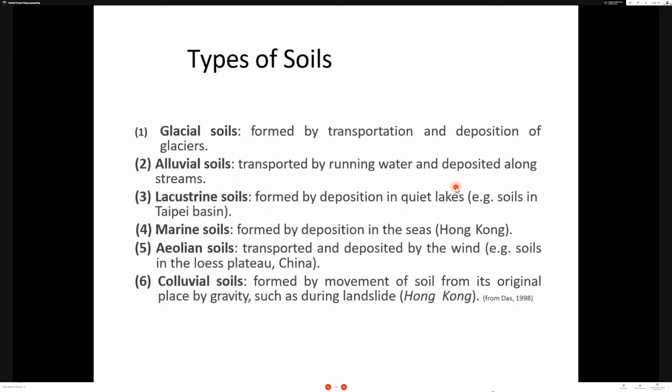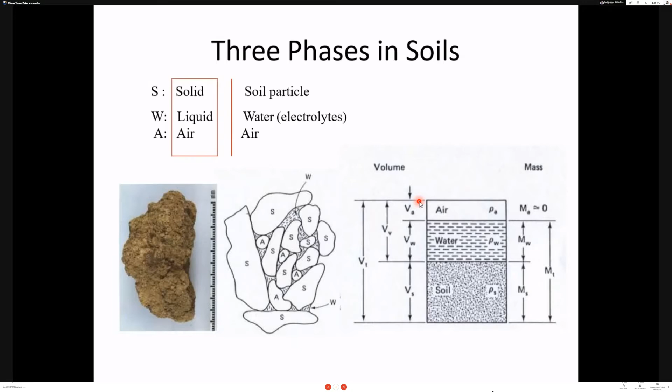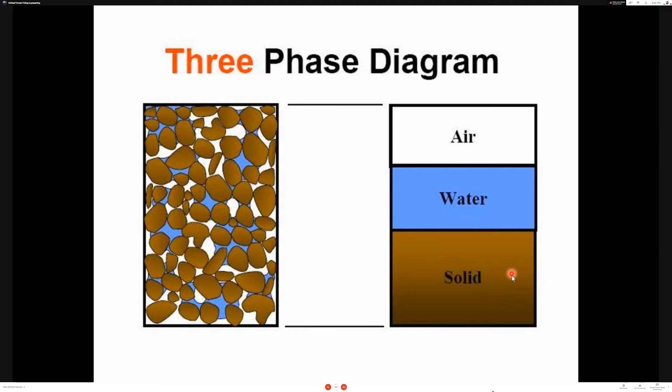So the three-phase diagram of soil: you have air, shown as white spaces or voids within the interstices of your soil particles, which are represented as brown particulates here. Your water is also along the pore spaces and serves as a bond for the particles, and your solid is represented in brown. However, we also have a two-phase saturated soil phase.

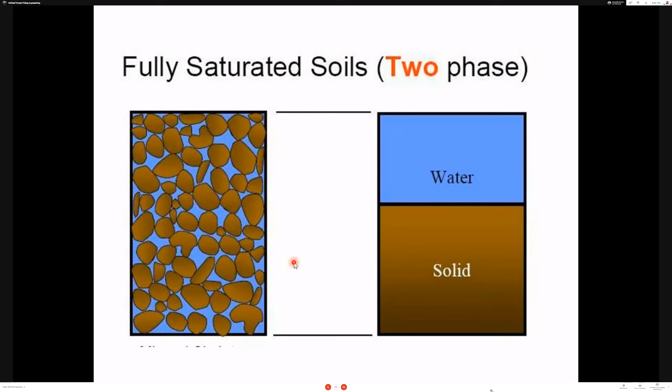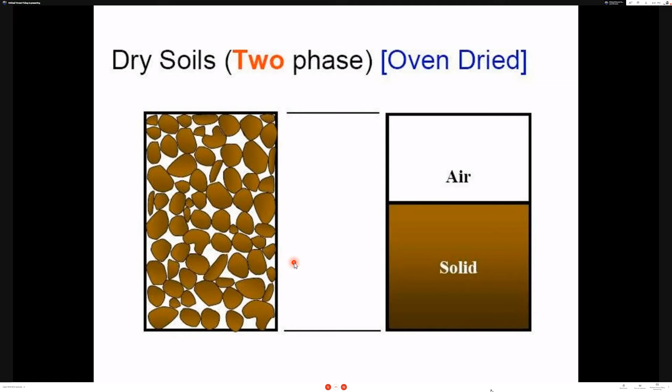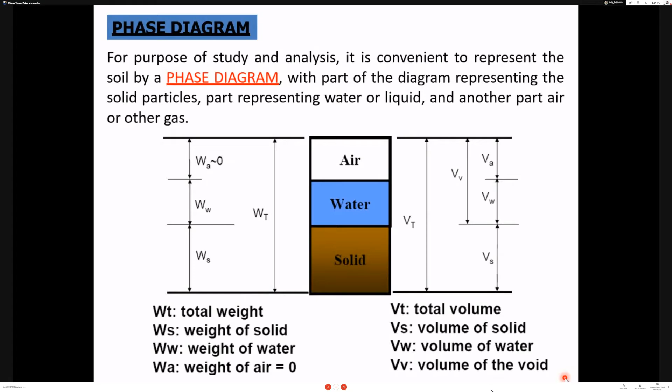Let's check the volumetric ratios for your three-phase soil diagram. For void ratio, denoted as E, all you have to do is determine the volume of voids over the volume of solids. First you determine the volume of voids, which is just the combination of the volume of your water and your volume of air. So that's volume of voids divided by the volume of solid. That's how you get the ratio.

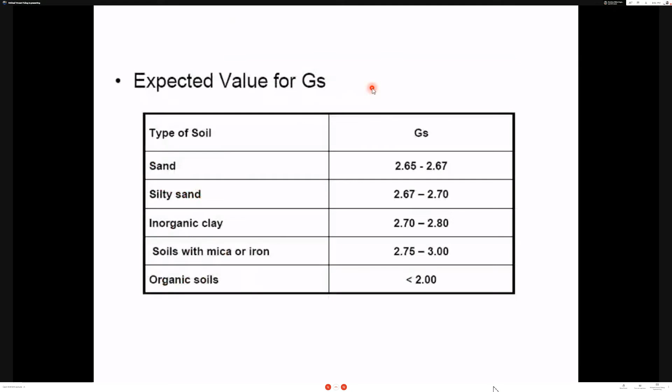A number that basically represents the porosity, because these are voids. So the volume of your voids divided by the total volume represents the porosity. Balik tayo sa porosity, which is the total volume of your voids over the volume of your soil, total volume of your soil.

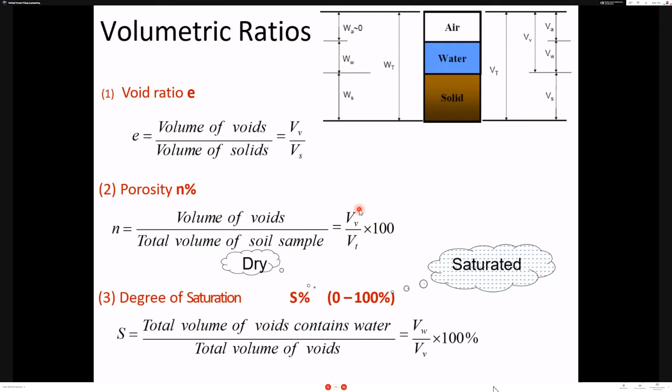That's why you will come up with the following simplified equation, E is equal to N over 1 minus N, where 1 here is the total sample. So aside from this, if in an exam you're not given the total volume of your sample and the total volume of your voids, but you're given the porosity, you can use this equation to determine the voids ratio of your sample. Understood?

So these are just simple mathematical manipulations of your equations. However, conversely, your porosity can be determined by dividing your total voids ratio over your volume, which is denoted as 1 plus the ratio of your voids. So that's the determination of porosity in this case, using the simplified equations in the phase diagram.

So on this phase diagram, remember that your porosity is denoted as VV over VT, or the volume of your voids over the total volume of your sample. And your VV can be represented by E, meaning the total volume of your voids can be represented by or represents the total voids ratio itself.

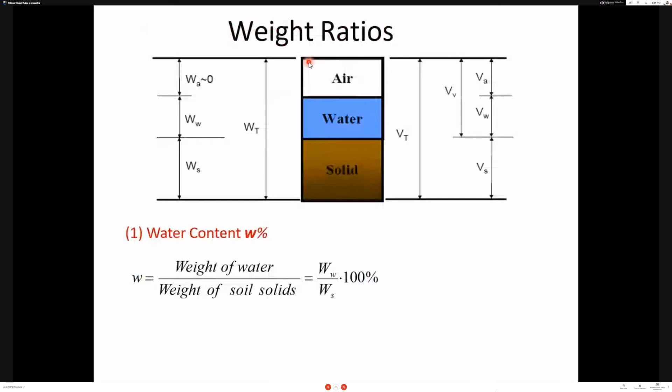First, the weight of your water can be determined by the volume of your water times the unit weight of your water, as determined in this section. This is the determination of your submerged weight with respect to your saturation of the sample, and your total wet or moist weight itself. That's why you're able to come up with this equation.

So you are going to divide the denominator and numerator on the RHS by VS. In this case, you will come up with this one. Okay? So you can use this. Actually, you can use this, guys, depending on what is given, but you can also use this equation.

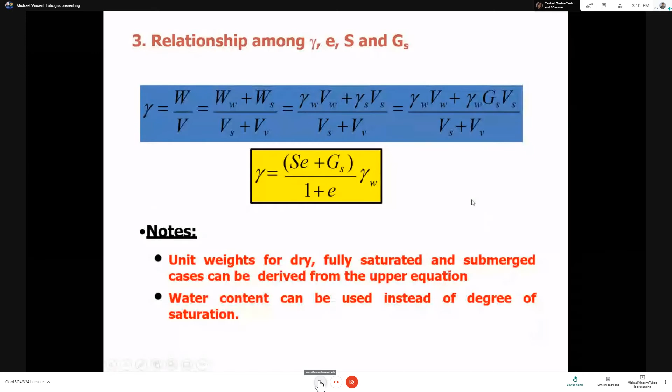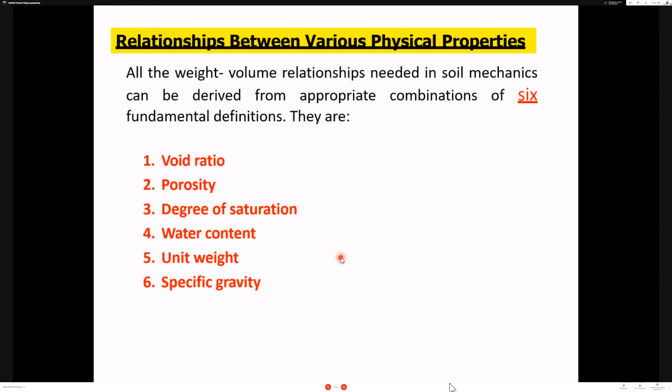Saan ako to, guys? Kindly screenshot this one. Ito yung mga formulas, important formulas na pwede mong gamitin to determine the relationship of your saturation, void saturation, the saturation of your soil sample, and the specific gravity. Familiarize yourself with these equations, guys, and as much as possible, familiarize yourself with this symbol.

Okay, let's have a sample problem. So if you have a moist unit weight of your soil that is 19.2 kilonewton per meter cube, and given that the specific gravity is 2.69, mean to say this is just the specific moist sample, and its water content is 9.8%, mean to say the water weight is 9.8%. How are you going to determine the dry unit weight?

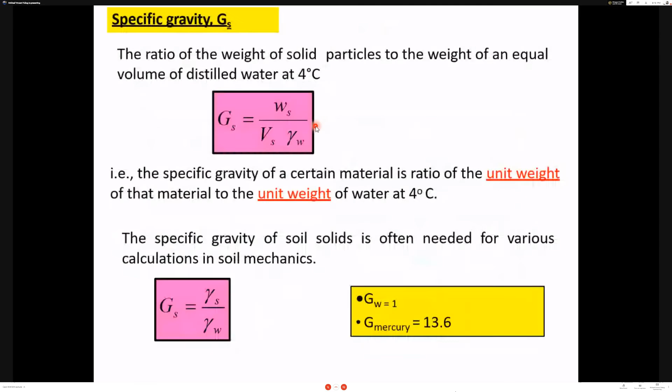Dry unit weight, unsa to'y formula? This one, okay? Pwede ka din gagamit ng, gisimplify ra ni because may given, W man. Kung pwede ka rin gagamit ng ganito, like this one, WS over total volume of your sample, but in this case, you are going to determine the total volume of your sample first, which requires another solution. So why not? You just have to determine the total volume of your sample, and you all know that the total volume is equal to what? 1 plus the volume of, diba?

So voids that is saturated with water. One represents the solids here, and the W here represents the water in your void spaces, diba? Nagets ninyo ning 1 plus W? Anong nahimo siyang 1 plus W? Nakuha niyo ba to, guys? Bakit siya naging 1 plus W? Yes, sir, okay, that's good.

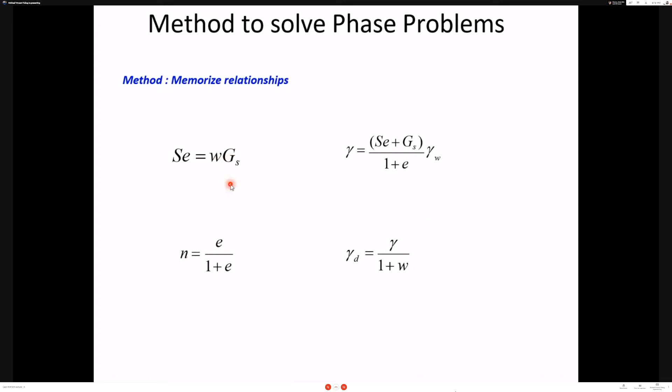How about void ratio? So ang iyang gigamit ani guys is this one, either this one, pwede din itong void ratio niya. So W GS over S. So I think gi-manipulate lang niya ni siya. Yeah, nagdi-manipulate gud siya, 1 plus E. Ang 1 plus E, ano nga yung 1 plus E here? It's this one, kani ang gigamit na equation.

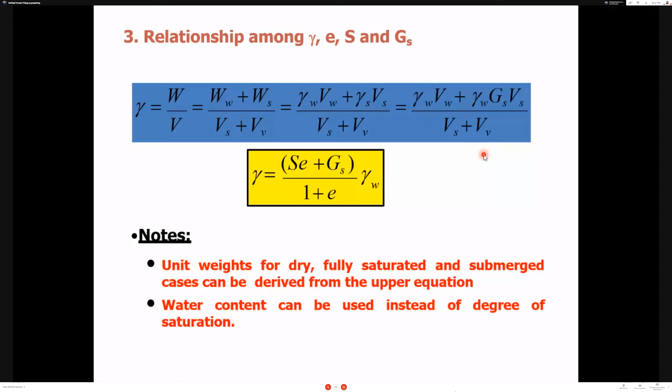The volume of your solid plus volume of your voids. Okay, and dire ang 1 plus E is this one, total volume itself. How about the porosity? The equation, katong simplified equation kanina. And the saturation, katong ikaduhang equation. So in this case, gigamit niya ang katong iyang transpose, transpose ba tawag? Yeah, transpose to determine the saturation.

So you work out on the available formulas. Okay, sa mga exams natong to, I will not stop you from looking at your notes to check the formula, but as much as possible, familiarize yourself ha. Hindi ko naman kayo pipigilan na mulantaw sa inyong notes or sa ato ang slides kung sa tong mga formula. It's just that as much as possible, familiarize yourself with the formula. Dili pwede nga similar lang sa math guys nga unsa ni kung palantaw na mo notes magsalig ra mo sa inyong notes, bibalag wala mo kasabot sa formula.

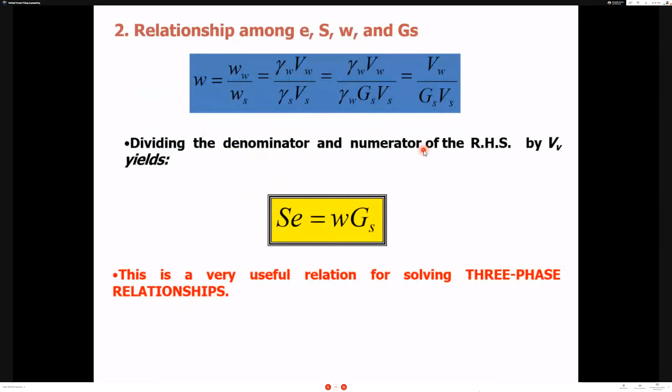Okay, so you have to practice lang kani siya, dili na siya walay teacher nga maka pasabot dayon ninyo ani sa usa ka discussion. Okay, it's just that at least gitagaan ta mong idea unsay nahitabo, and this one, tingala mo nga present kanina nga mga formula na unang usob. It's because nagkakaroon ng simplification process. Okay, gisimplify ang mga equation in these examples.

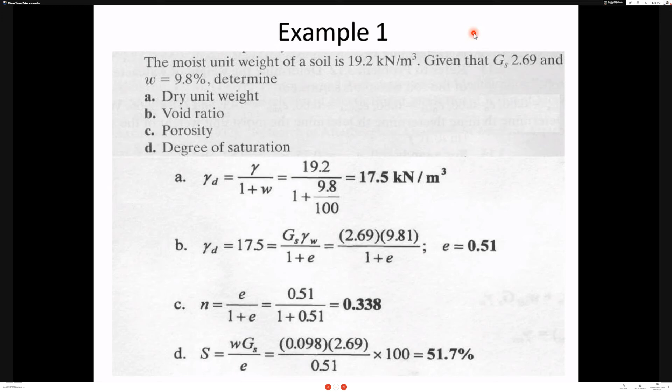And then example 2, you have the field density testing of your bulk density of a compacted road base, which is 2.06 grams per cubic centimeter with a water content of 11.6%, so W in this case. So specific gravity of your soil grain is 2.69. You have to calculate the dry density, porosity, saturation. Okay, so dagan kay ka makuha ra nimo ang imuhang saturation with respect sa voids, the dry density, the ratio of your voids, the void ratio, and then the dry weight sa imuhang sample.

So for this case, naakay 1, 2, 3, 4 kabuo answers. So mugamit lang ka ato nga mga formula, laruin nyo lang yung mga formula, whatever is given to you. So it is important na pag mag-solve mo yung mga problems like this one, you have to note first what is given. So kung unsang gihatag, porosity ba, volume ba, diba? Kasi kung unsang ihatag mo na yung inyong gamiton formula, dito magdepende ang inyong formula nga gamiton to solve the equation or to solve the problem.

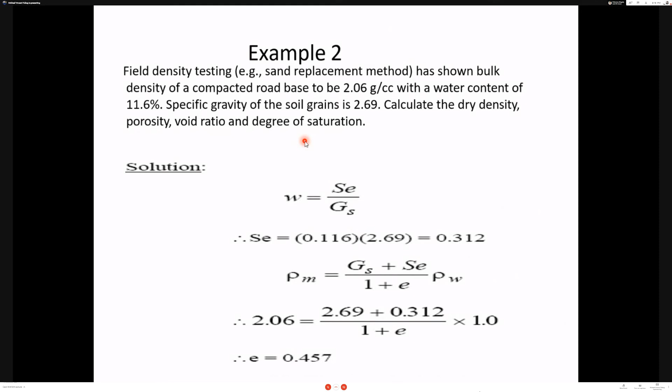So the relative density, this is the volume of your sample as it has been reduced because of compaction. So from the original sample, it gets compacted, maybe due to lithostatic pressure. So the solids and your voids, how much is the change in terms of the change of your height, or the change of the length of your sample or the voids of your sample. And what is the maximum state or the densest state for this sample to adjust to the relative, or adjust to the maximum volume reduction.

So example, if you say this is the V minimum, denoted as Hv min, that means this is its density index. This is what we call the in situ density. Meaning that is the in situ density index. If you say that, this is its maximum compaction, the maximum for voids to adjust, or for your voids to change in terms of height and volume, height or length, as well as volume.

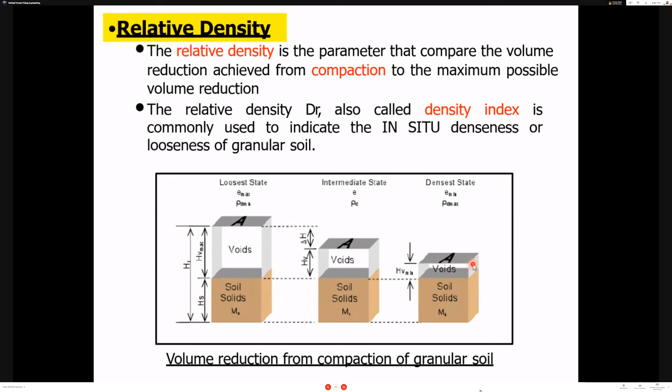So the one we tested earlier, that E, that is the in situ void ratio. In situ means before it has undergone any laboratory analysis. While your E minimum, this is the void ratio of your soil in the densest state. The void ratio of your sample when it has been compacted very well or reduced greatly due to applied pressure. So what could be the E minimum? Why is it called minimum void ratio?

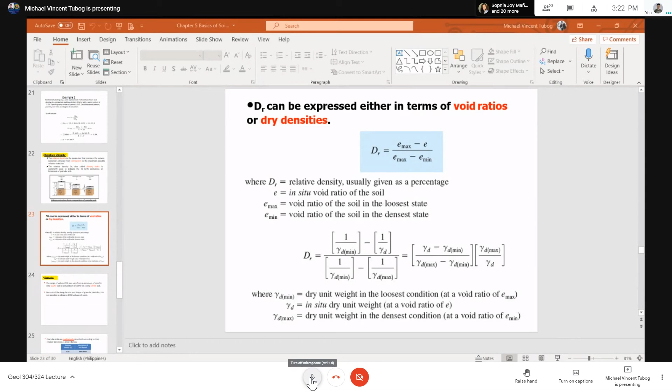All right, let's refrain from using the term pores, since we might confuse it with pore spaces in sedimentary rocks. Let's just use voids instead. For soil, let's use voids. I used pores earlier just so you could imagine it, but from now on, as much as possible, when we talk about soil, use voids. It's okay if you're talking to a fellow geologist since they'll understand, but if you're talking to a civil engineer,

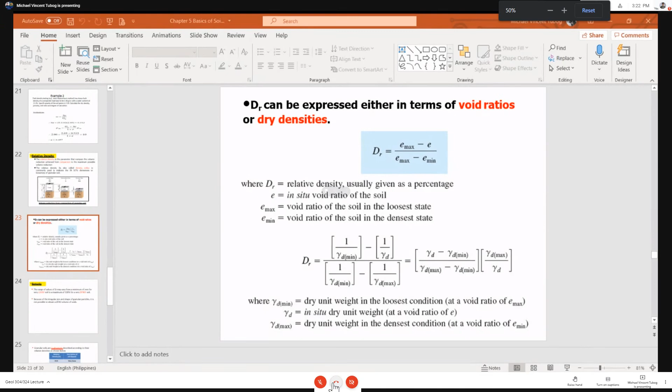So we're all different. Anyway, if we complicate it further, what if the given is the dry weight? If you don't have a given void ratio for your sample but you have the dry weight, then you use the dry weight itself. The minimum dry weight and the maximum dry weight of your sample can be used in this particular scenario.

So how do you handle it, sir, if you weren't given the Emax or E minimum? Simple, if your sample was obtained and oven-dried, but you didn't get the data for the original or in situ void ratio, then you can use this instead: the dry weight itself, the minimum dry weight and the maximum dry weight. There are just some simple adjustments or simplifications to your equations.

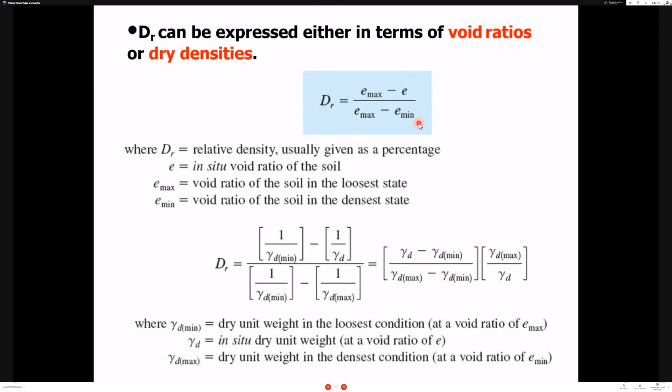So always remember the density, the unit weight of your dry sample in this case. Your density index can be derived by taking your unit dry weight minus your unit dry weight minimum - meaning this is after you've applied the pressure - over the unit dry weight maximum minus unit dry weight minimum. So it's almost the same, or almost similar to your original formula for the density index of your sample.

So your DR may vary from minimum to 0 for loose soil, and to a maximum of 100% for dense soil. If your DR is 100%, that means your sample is totally compacted. The relative density or density index of your sample is almost fully compact, meaning 100% dense.

Because of the irregular size and shape of granular particles, it's kind of not possible to obtain zero volume of voids. Remember from sedimentology, the regular shapes of particles in a cubic volume of space. If you place particles of the same size, what will happen? Since they have the same area and size, there will be bigger voids or openings. But in this case, your soil is irregular in size, meaning it's varied, mixed, and different classes combined. So with varying particle sizes and shapes, it's very hard to make your voids zero.

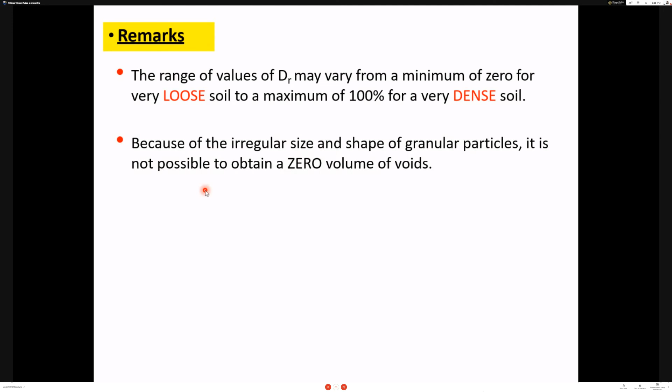Okay, how about this one? You have your granular soils described qualitatively according to their relative densities. If your granular soil has a relative density of 0 to 15%, then you are looking at a very loose soil deposit. But if it has 85 to 100%, meaning close to totally compacted, then you have a very dense soil sample.

Let's take an example. In Negros, somewhere in Dumaguete, if you happen to examine the soil, like the one you visited in Sibulan, that quarry area—look at the soil cover there, what classification would it be? If you compute the relative density, where would it belong? I haven't actually been to that quarry area in Sibulan. Is it loose or dense? I would say it's medium to very loose.

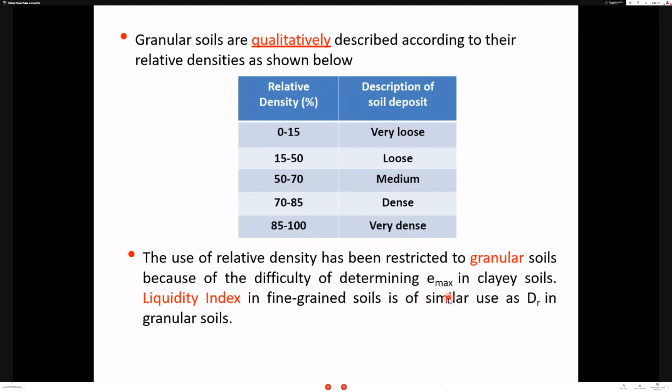The liquid limit test determines how much water the soil can absorb. The soil is said to be at its liquid limit when exactly 25 drops are required to close the groove for a distance of 12.7 millimeters, or half an inch. So what happens is you create a groove in your soil sample. You do this continuously, using water, until your clay sample expands.

Or clay soil. When you expand it, the groove that you made will close. So if you need 25 drops of water to close the 12.7 millimeter groove you made, which is half an inch in length, then that is the liquid limit of your sample.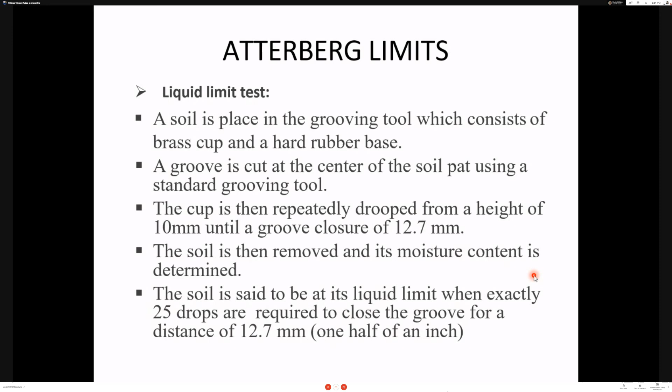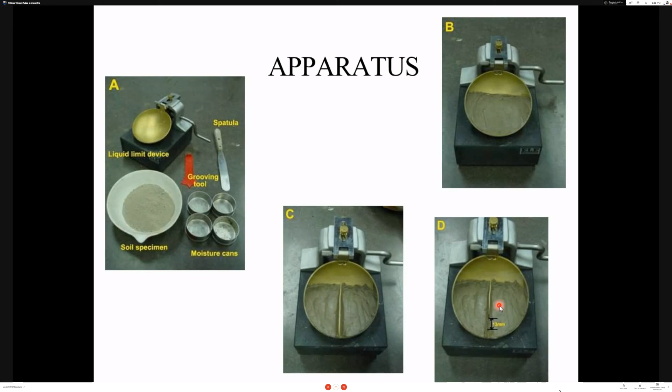This is the apparatus used to discover this. So you make a groove, like this. In this groove, since your sample is clay, it will expand. Eventually it will close your groove. So the maximum number of drops needed to expand your clay sample until it closes, that is your liquid limit.

Now, the plastic limit of your sample is determined by rolling it into threads. You roll it until it becomes thinner and eventually breaks at 3 millimeters. You roll it until it breaks, and it will break at 3 millimeters.

So that means the diameter of its thread is 3 millimeters. Small, right? So it is defined as the moisture content in percent. You are already aware of its moisture content based on laboratory analysis, at which the soil crumbles and rolls into threads at 3 millimeters.

If it is wet, it breaks at a smaller diameter. So if your sample is wet, it will break at smaller than 3 millimeter diameter. If it is dry, it will break at a diameter larger than 3 millimeters. If it's too dry, that means the molecular bonding in your clay minerals inside your sample is weak, that's why it will eventually break because the plasticity of your clay is not increased.

But if water is added, then the plasticity of your clay will be increased because your molecular bonds are becoming stronger due to the water molecules that bond with your clay minerals. That's why it will break at equal to or less than 3 millimeters diameter in your thread sample.

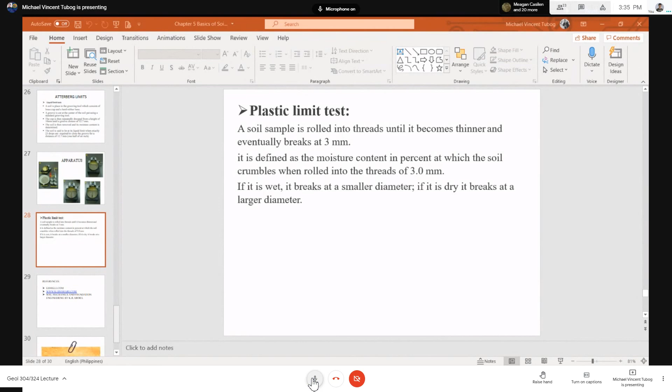So next meeting, our lecture will be on shear strength of soil. So again, mathematical symbols, many equations, bear with this topic because this is engineering geology, guys. Welcome to our field.